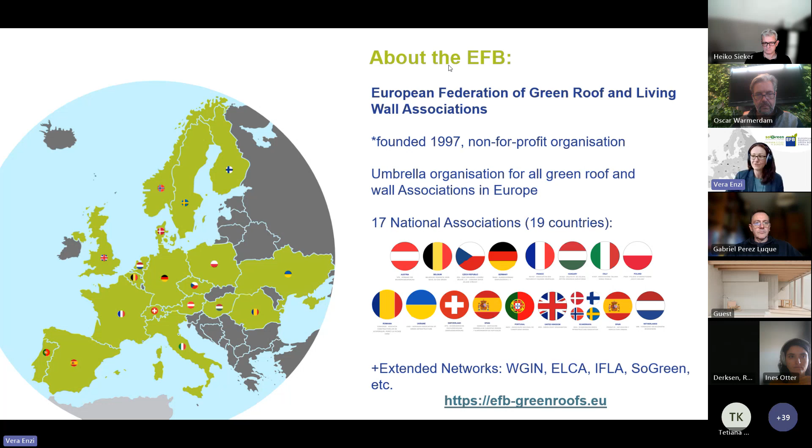And of course, we have a lot of cooperations ongoing, for example with the World Green Infrastructure Network, the European Landscape Contractors Association, the International Federation of Landscape Architects, our SoGreen initiatives, etc. If you're interested, please feel free to visit the EFB website or get in contact with us over our different social media channels or via email.

Yes, my introduction talk, we already heard it. I'm from Austria. My background is actually landscape planning and landscape architecture. I've worked in research and also practice on especially green roofs and green walls, but I've also touched certain recent developments, like for example sponge city tree planting.

We had a very large flood event in Austria over the past few months. You can see a picture here on the left. Basically a very huge area of Austria looked like this for a couple of days. It was a big disaster. Even people died. It took a lot of time, of course, to get all the water away again.

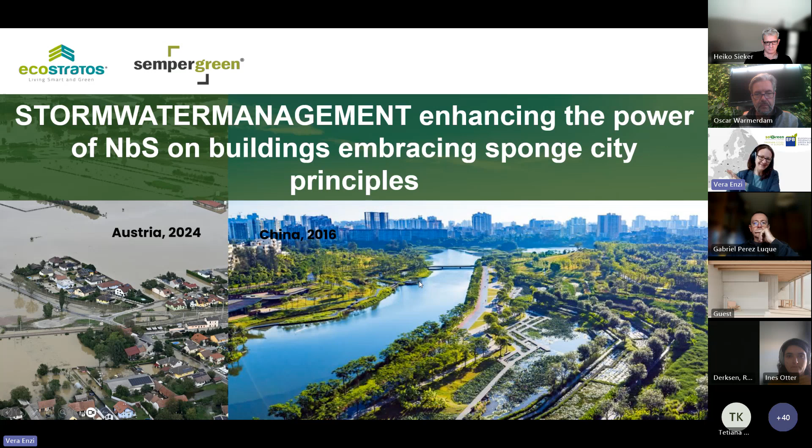And still a lot of insurance companies obviously have their cases open. And what could be more interesting than this current time to talk about stormwater management and enhancing the power of nature-based solutions for stormwater management, and embracing maybe sponge city principles. So this is a Chinese city that you see on the right side. It was actually reshaped by Kongjian Yu. Maybe you know him, he's like the Pope of the sponge city, inventor of many projects and principles. So I think what we are going to talk about today will refer very well to these two pictures.

Yes, what's coming now in my brief 10 minutes. So I'm going to do a quick overview for you on the European Commission terminology - where do we find stormwater management currently? Then I will pinpoint some related EU policies and directives in that context, where we as EFB and on the national levels, people like you and all the people who are listening, can actually do something about this and bring forward this important matter. I will focus quickly on what national associations can do on their national scopes and levels in the current situation.

I'm going to close my quick overview with two related Horizon projects that are just about to close next year, which I personally found very interesting and I'm following because I think they have quite interesting content.

It all started a couple of years ago. The European Commission, in the very beginning, published Eine grüne Infrastruktur, a green infrastructure for Europe. Starting with this, a lot of different concepts, regulations and policies have been embedded. You can already see in this picture a lot of important components for stormwater management, because these are all different kinds of solutions.

If we're talking about natural river reconstruction, or of course green roofs and green walls, or also nature protection areas, biological agriculture, sustainable tourism - there's a lot of different activities that can come together in order to help water get treated on site and get into a natural water cycle on site, so that heavy storm events can pass without big damage.

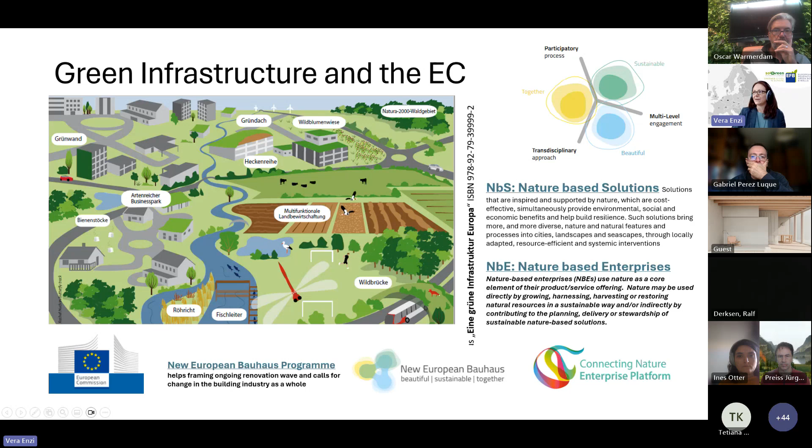In order to bring us who are delivering - planners, system providers, etc. - together, the Connecting Nature Enterprise Platform was established a few years ago. It's a large, growing community, so in case you're interested, I advise you to take a look and maybe sign up there.

What else did I bring today in relation to stormwater management and the European Commission? Current drivers - we have a lot of interesting directives and national processes ongoing.

What you can see here are the guidelines for member states for the adaptation strategies and plans - basically a manual provided by the Commission for our national member states in order to successfully adapt to climate change.

Then we have four different directives that I brought today - there are even more, but I just picked a few with a direct link to what we're discussing today. The first would be the Urban Wastewater Directive. It currently has an open window where, on national level, member states have to establish their national integrated urban wastewater management plans until 2033. Of course, there are people already working on these plans. Now is the time we integrate nature-based solutions also on buildings, like green roofs and walls, into these national plans. So if you get knowledge about people working on these plans, get in contact and be a good consultant for them.

Second, the EU Nature Restoration Law, which passed a few months ago - I must say I'm very happy about that. The nature restoration law also contains measures for urban areas and cities, for example when it comes to a certain degree of tree coverage. But also now, members must prepare their national restoration plans and submit them until 2026.

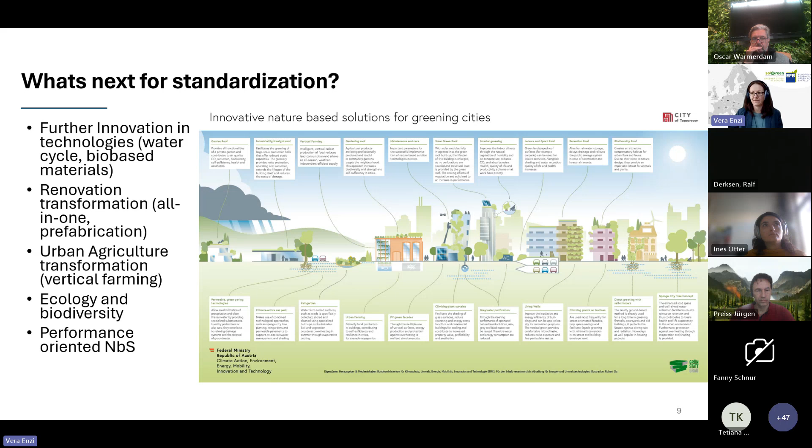And a lot of these technologies nowadays are also not standardized, just like green technologies. So here also lies a lot of work in integrating closed water cycles, bio-based materials, prefabrication, ecology, to be honest, a lot of performance-oriented aspects of nature-based solutions.

This is my last recommendation before I open the floor for our second speaker. These are two ongoing Horizon projects supported by the European Commission that I found quite interesting. They are both focused on nature-based solutions for water treatment, approached with different scopes and styles. The first one is Multisource.

They also work with demonstration areas and demonstration plots where they actually take their measures out. In the case of Multisource, for example, in Leipzig at the Umweltforschungszentrum, there is a big green roof test site for stormwater management, and the results from this test site are implemented in the NAT4WAT management tool that planners will be able to use after the project is finished.

They also try to engage and present the results of the project in specific policy briefs that can be used very well if, for example, you want to inform a city or a policy officer on suitable solutions they could undertake.

So these policy briefs are published on the website. The second project is the NICE project, which focuses a lot on green roofs and green walls, as well as different aspects of water treatment. This project is very strong in its events, and it offers a huge amount of webinars specified to certain NBS technologies.

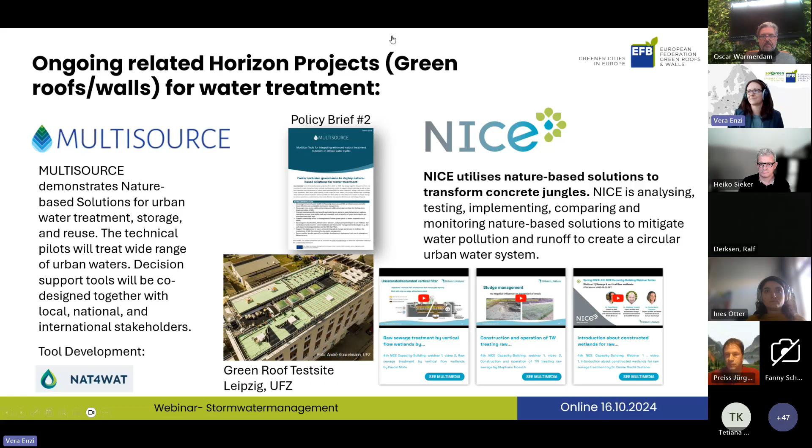I would talk about stormwater management, between heavy rainfall on one side and heat stress and drought problems on the other side. I do this from a Berlin perspective, because Berlin is in a few ways quite special, and I want to explain this first, because maybe then it's easier to understand why we follow this strategy in stormwater management.

As far as I know, Berlin is the only larger city in Europe which takes all its drinking water from within the city border. We do not import water. That has to do with the historical situation - there was a wall around at least the western part of the city. If you look at other cities, Munich gets its drinking water from the Alps, Stuttgart from Lake Constance, and other bigger cities take it from the outskirts. So Berlin is different.

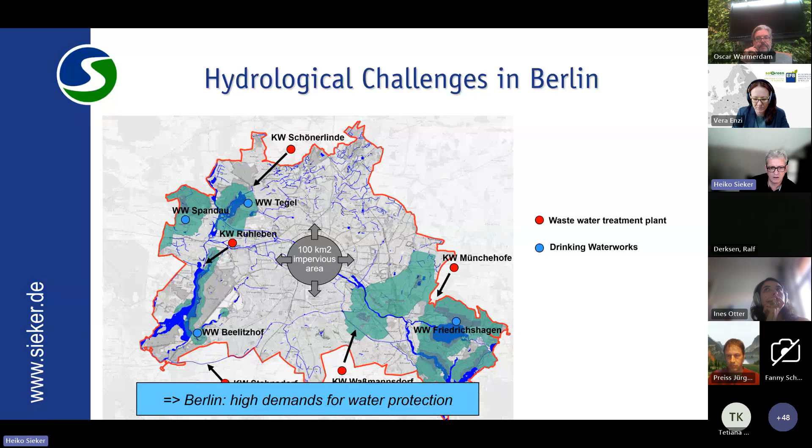That's something we've been working on here for many years. Our challenge typically is about water pollution control. Compared to other cities, we have a very slow flow in the rivers, and large areas are groundwater protection zones. So treatment is very important, also treatment for stormwater runoff, for rainwater.

On the other hand, flood control, at least in the bigger rivers, is not so much a problem - there we are in a relatively lucky situation. If you look at the River Spree and Havel, the main rivers here in Berlin, compared to bigger rivers in Germany like the Rhine, the flow rate is very, very low. However, like other cities, we have problems with overloading of the sewer system. So retention of stormwater is important, but not to protect from flooding in rivers, but more what we call pluvial flooding.

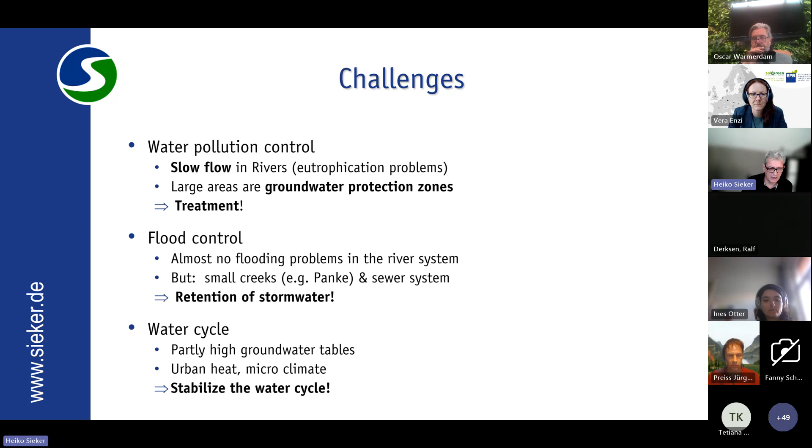And the water cycle in general is also a problem. That led, between 25 and 30 years ago, to a change of mind in Berlin regarding stormwater management. Here you see a picture of one of the first projects, which was built in the late 1990s.

And it's quite interesting, it's quite a large residential area. You can see all the buildings have green roofs. We have infiltration devices here for the road runoff. And although this residential area is located very close to the river, there's no runoff. So all the rainwater from this area stays in the area, no runoff, and keeps up the groundwater renewal and so on.

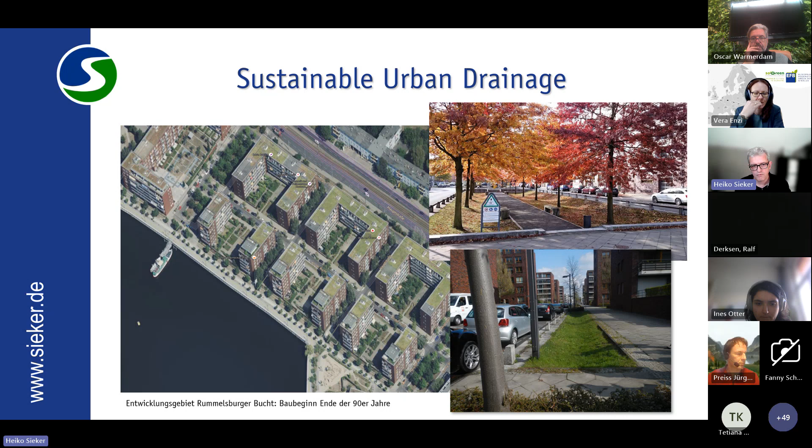What is really interesting is that these hydrological challenges changed a little bit in the last 5 to 10 years. In addition to this water pollution control challenge, we see now also a challenge regarding the quantity of water. Just a very quick, very simple calculation.

If you take all the capacities of all the water works together, it's approximately 1 million cubic meters per day. On a hot summer day, all the Berlin people, around 4 million, use 1 million cubic meters per day. And if you transfer the units, this ends up with around 12 cubic meters per second. So that's the demand for drinking water.

If you look at the inflow from the rivers, these are the two main rivers here, Spree and Havel. Together they have 36 cubic meters mean flow. And you can imagine mean flow means that is the annual average. In summer, when there's a drought situation, the inflow from these two rivers is even much lower, especially from the Spree, it's almost zero. And then the capacity of the waterworks is larger than the inflow from the rivers.

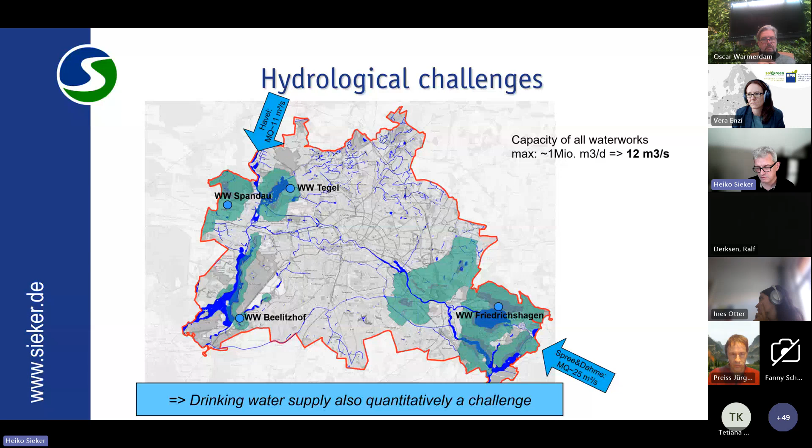And remember, we take all the water from what is created in the city. So drinking water supply quantitatively is a new challenge for the city, and our authorities here in Berlin are very aware of the situation. And the big problem is that this gets worse, mainly due to three reasons.

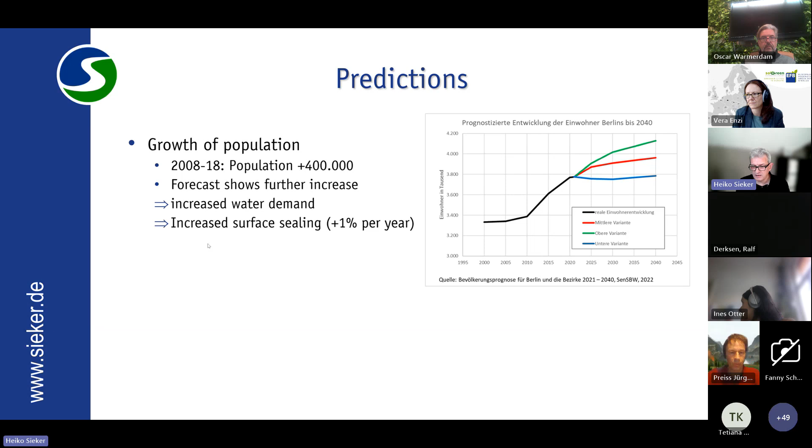First of all, our population is increasing. We have a growth in the, for example, between 2008 and 2018, so in 10 years, the population increased by 400,000 people, roughly 10%. And if you look at the forecast, all the predictions are showing further increase in the population. So that means, of course, if more people need more water, and they also increase more surface sealing, around 1% per year right now.

And then also the inflow situation is getting worse. First of all, due to climate change, but not only — it also has to do with the upstream catchment, which is shown here on this map. You see here the yellow area, that is Berlin, and the area shown in the picture is the catchment of the river. And there's a lot of coal mining.

And as you know, in Berlin we stop coal mining here until 2038, which is good from the CO2 point of view. But regarding the water situation, that means all these open coal mines will be filled up again. So all the water in the catchment will go to the open coal mines. And that means the inflow to Berlin is even going down in addition. And then climate change comes on top.

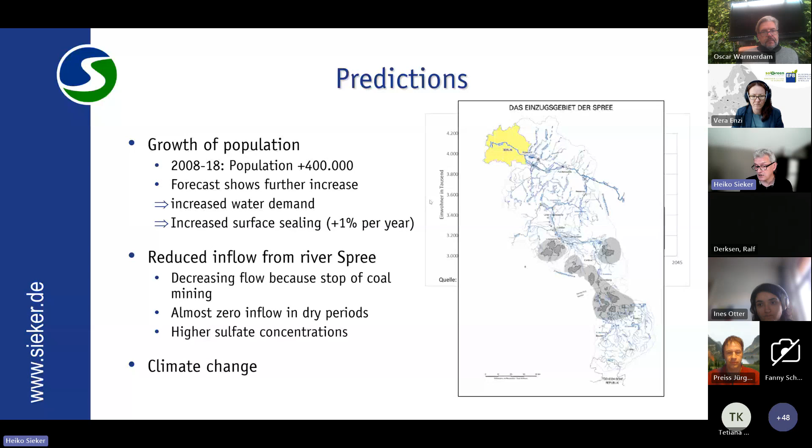And what is definitely increasing is evapotranspiration due to global warming. And global warming means higher temperatures, and higher temperature means more evapotranspiration, that's obvious. And if we look at the climatic water balance, which is the difference between rainfall and evapotranspiration, it's already negative in Berlin, and this is increasing. So the deficit is increasing.

And that means by definition, we already have what is called semi-arid conditions here in Berlin, which at least for Germany is quite new. Maybe it's different in other countries, especially in the Mediterranean area — you are used to that. But for German conditions, this is a relatively new challenge, I would say. So climate change will definitely intensify the drought problems. And this all adds up.

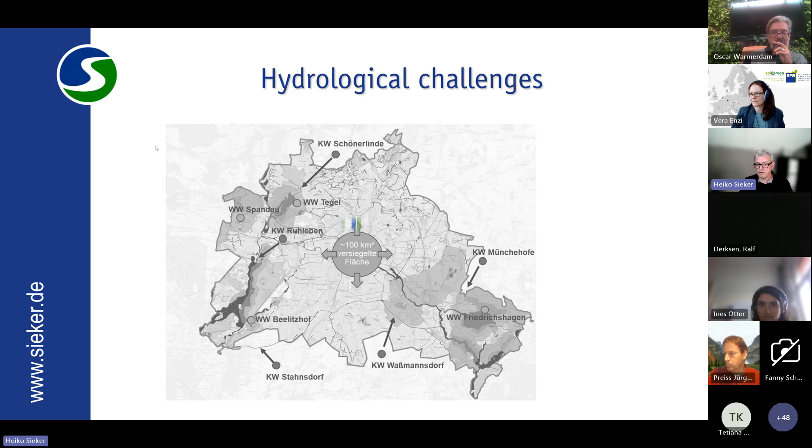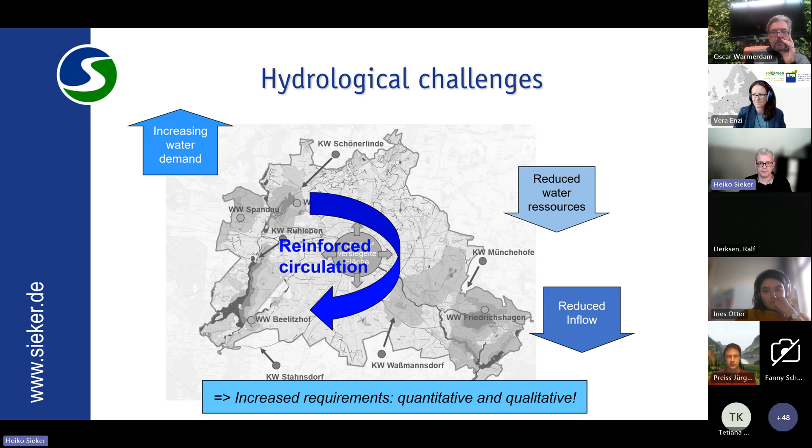We have an increasing water demand on one side, and reduced water resources and reduced inflow, which means the circulation we already have will be reinforced. We really are facing big challenges here in Berlin, and the city government is aware of that. That's a good motivation for the stormwater management, which I will explain now.

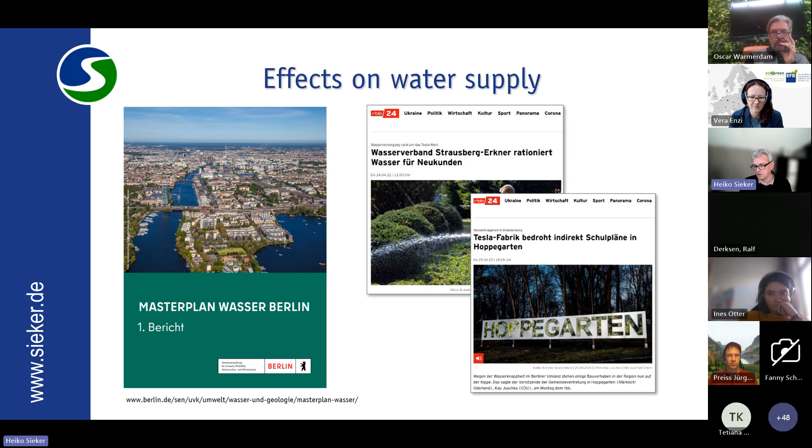Maybe some words on the effects we can already see. We have limitations in water supply. For example, myself, I'm not allowed to irrigate my lawn in summer anymore. I have restrictions. You know this from the Mediterranean area, or from Las Vegas, for example. They have similar regulations. At least in Germany, this is new.

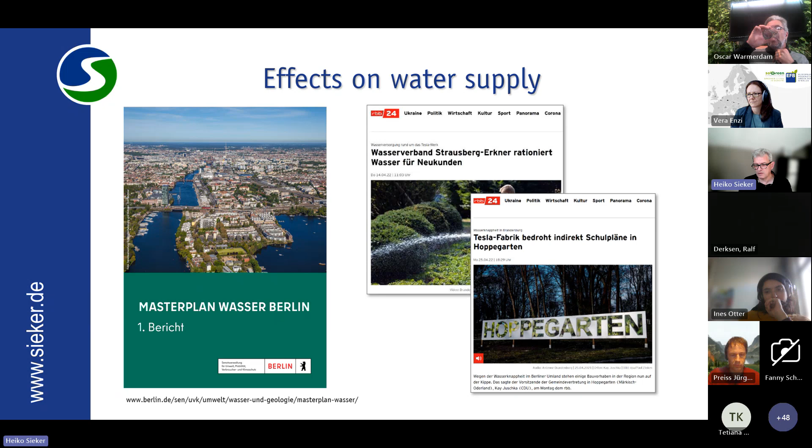We also see the effects on the water courses already. A lot of the smaller water courses are dried out. That's new, we didn't have that 20, 30 years ago. This is a new picture. So we already see, due to climate change and other factors, that the landscape is changing due to climate change, and not on a global level, but on a local level.

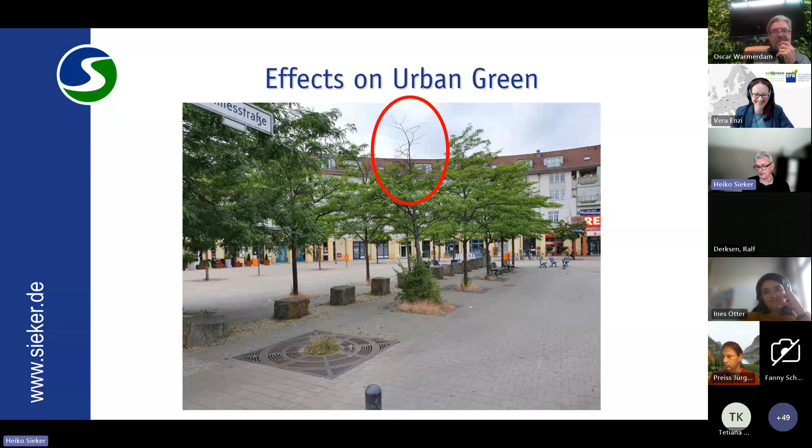That's really impressive. And what we also can see is the impacts on the urban green. We have a lot of trees in Berlin, urban trees, but many of them are in bad condition. For example, if you look at this tree here, it's not in good shape. I'm a civil engineer, not a biologist, but even as a civil engineer I see that this tree is not in a healthy condition. And if you look at this tree here in front, it's already gone.

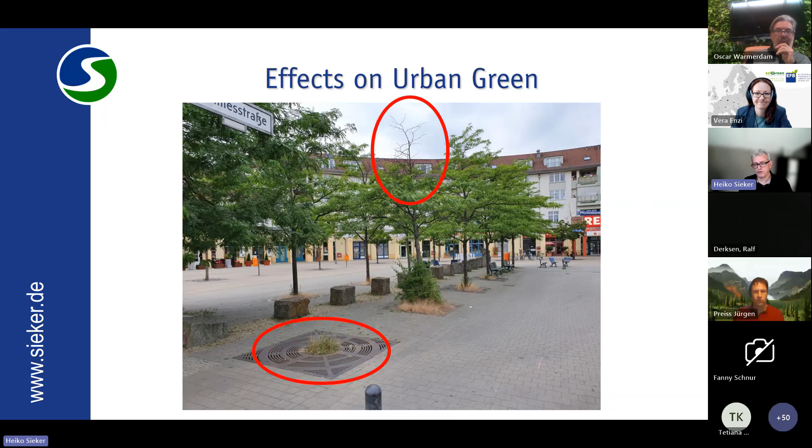This is not just a single case. I think, what I read, more than 50% of the urban trees are more or less affected by that. So in total, to summarize, we have problems with heat and drought. Our water resources, the stress on the water resources, is getting worse.

On the other hand, coming back to the title of my presentation, like every other city we have big problems with heavy rainfall. If it rains, typically the intensity is higher than it was before. We had one event here in 2017 which was really exceptional and which was a mind changer for the city administration. We had 200 millimeters in fact in 10 hours. This is not as bad as in Florida, for example, but if you compare this with the design storms we use as civil engineers, this is 10 times the design storm. So we have to deal with heavy rainfall also.

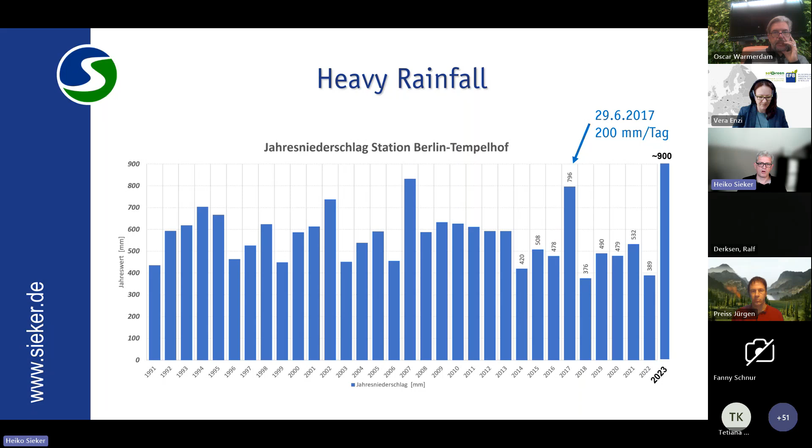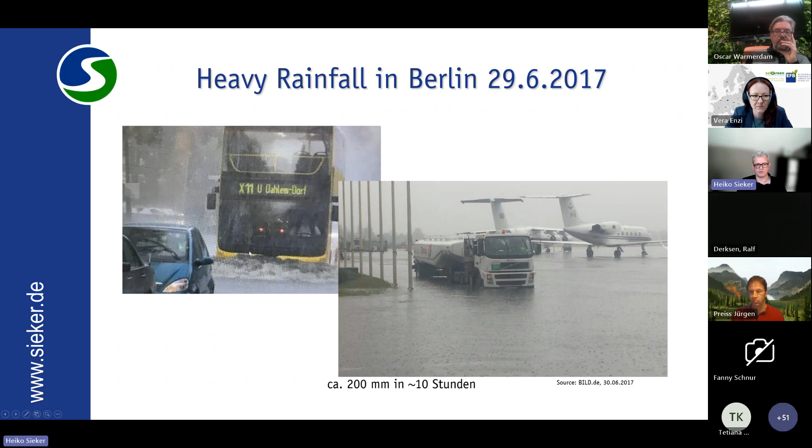So if we summarize this, we face two challenges. On one side, we have too much water during heavy rainfall, and on the other side, we have not enough water during the drought period. This is amplified by climate change for sure, but not only - it's also the urbanization. Locally, to change or influence climate change is very difficult, as you know. But regarding urbanization, we can do something. That's city planning - that is in our hands as civil engineers, as landscape architects, as city planners, to do something.

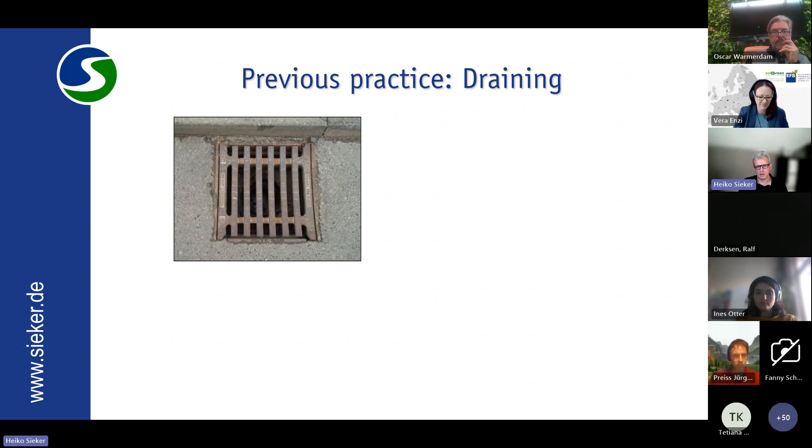So what is the response? It's definitely not the conventional way of dealing with stormwater, even though that's so logical. Our previous practice, what I learned at school when I studied in the 90s, was very simple: if you have a new residential area or a new commercial area, you need a sewer system, a storm sewer system. That was the only answer.

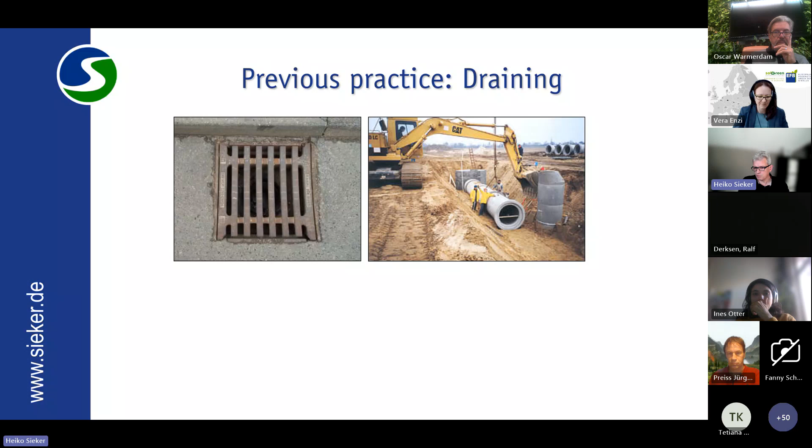And so we built a lot of pipes, and as you can see in the pictures, we trained our rivers, we built big concrete retention ponds, and so on. But even if you think that you can cope with heavy rainfall with that, it's very obvious that the other problem, the drought problem, is not getting better by this solution.

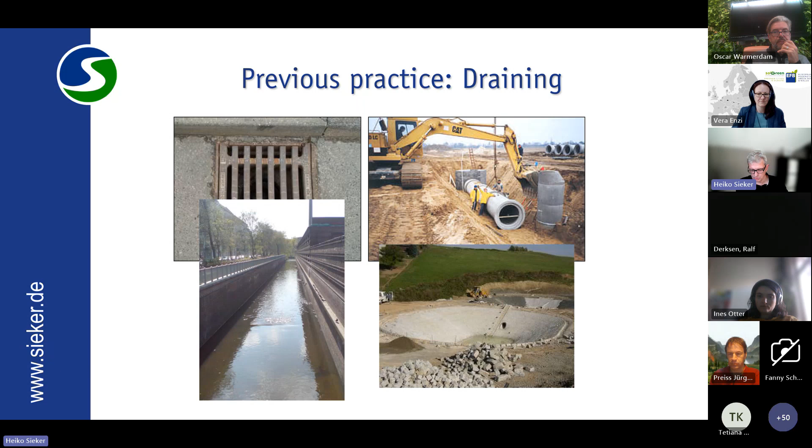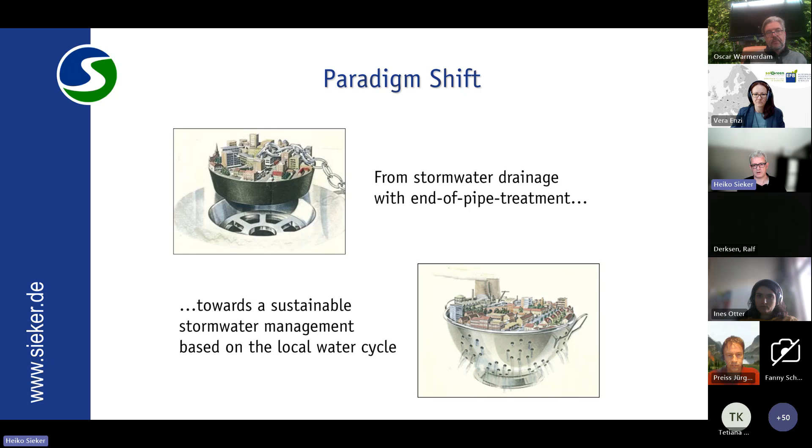So the solution is to deal in a different way with the stormwater, getting away from drainage with end-of-pipe treatment towards a more sustainable stormwater management based on the local water cycle - exactly, Vera, what you explained in your contribution. I think from the Berlin perspective, we can really say that we started to implement the Sponge City concept now in every project, and that's quite unique, at least in Germany.

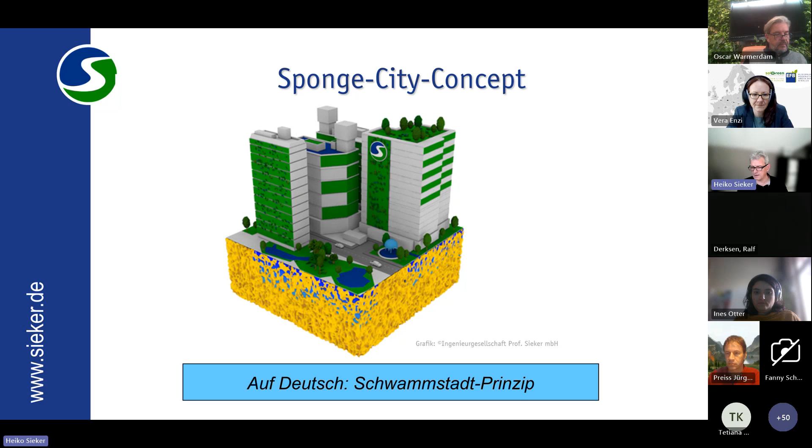There are many cities which have good pilot projects, but Berlin is far above the level of pilot projects. We do this on a frequent daily routine basis, and we implement all kinds of Sponge City elements.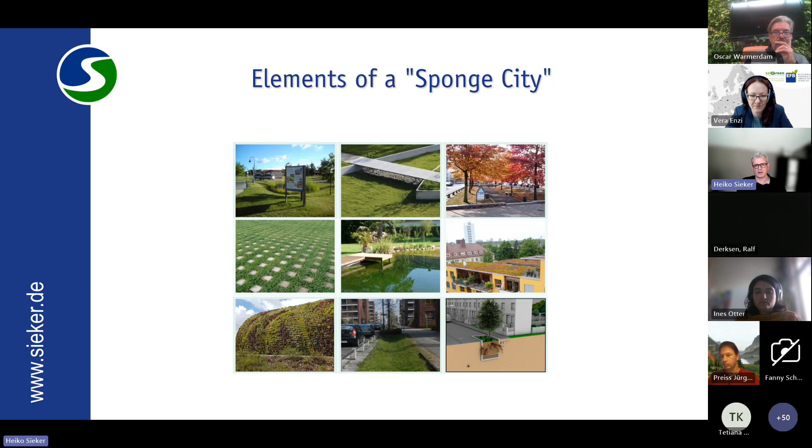For those of you not so familiar, Sponge City is not a single technique. It's more like a philosophy to deal in a different way with stormwater, and it's an umbrella for a lot of different techniques. You can see here different types of Sponge City elements: green roofs, open ponds, pervious areas, rain gardens, green walls, swales, and so on.

We started 25 years ago in Berlin. One of the big projects was the Potsdamer Platz, our central square in Berlin. The pond you see here in front is part of the rainwater management system. It's fed by runoff from the buildings in the background. So this is not a natural lake, it's an artificial pond, part of the stormwater management system.

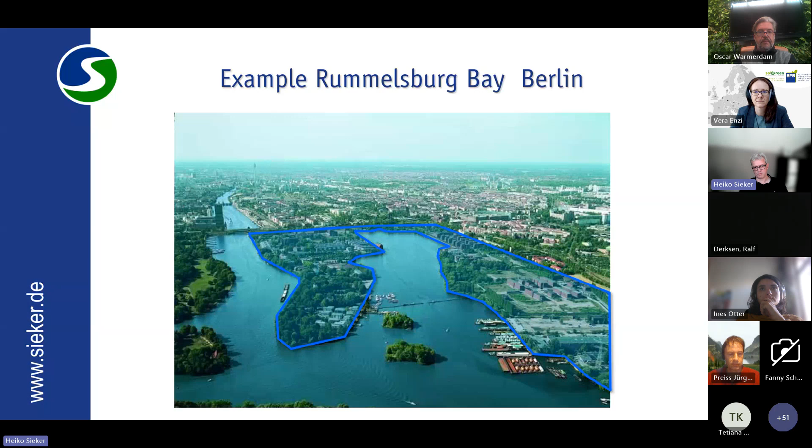I already mentioned or showed a picture of this Rummelsburg Bay. This was, I think, the best example we created 25 years ago, and you've seen this picture before. All the buildings got green roofs. We have, and this is a very important element, in the yards between the buildings a underground parking garage, and they get a green cover.

On the green roofs it's more like an extensive green roof, between 6 and 8 centimeters, not more. But here in the center, where there's an underground garage underneath, we have between 80 and 100 centimeters. That is, in fact, the best storage you can create for stormwater. It's very easy, it's very cheap, also due to statical reasons.

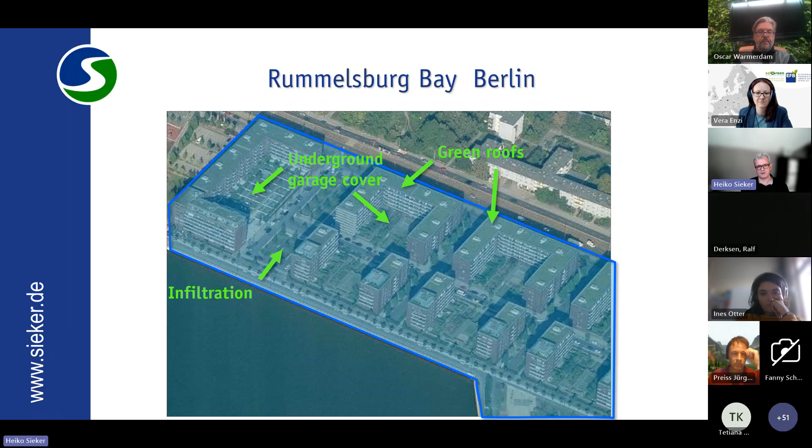Only the remaining overflow of these green roofs is then finally infiltrated. So although we have here 90% coverage with building and streets, there's not much natural ground left. However, we do not have surface runoff. So it's not the surface sealing which is creating the problem, it's the way you deal with the runoff from the impervious areas.

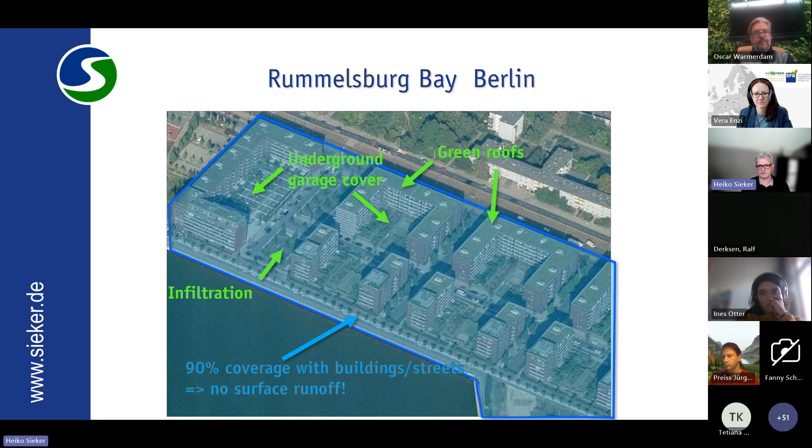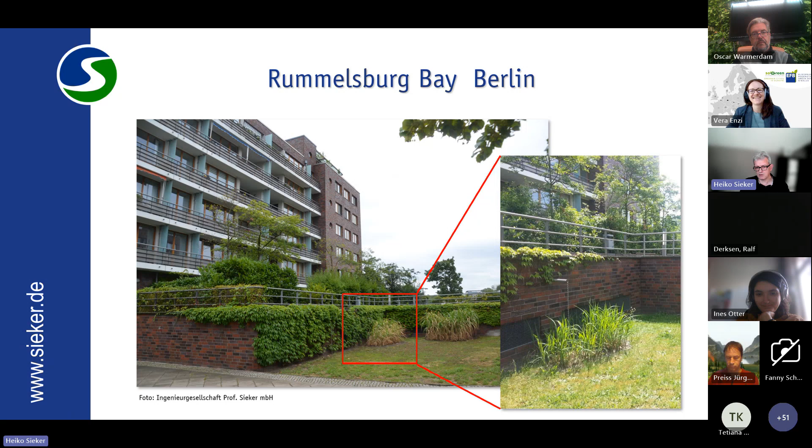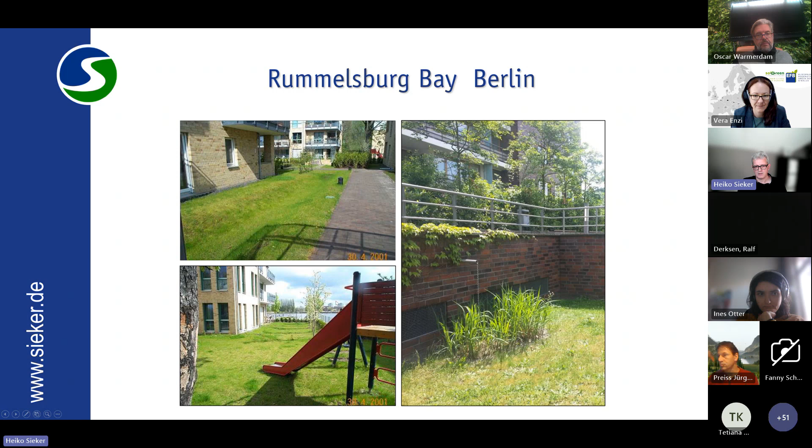This is a sponge. Yeah, it's so simple, in fact. You see from the date of the pictures these facilities are more than 25 years old, and I can invite you all, if you're ever in Berlin, visit this area. It's very impressive to see what's going on.

We also have larger, what we call pocket parks, which are first of all green spaces, but in a secondary purpose always store stormwater, especially during heavy rainfall. With this good experience from almost 25 years, especially after the heavy rainfall we had in 2017, the city introduced new regulations for stormwater drainage.

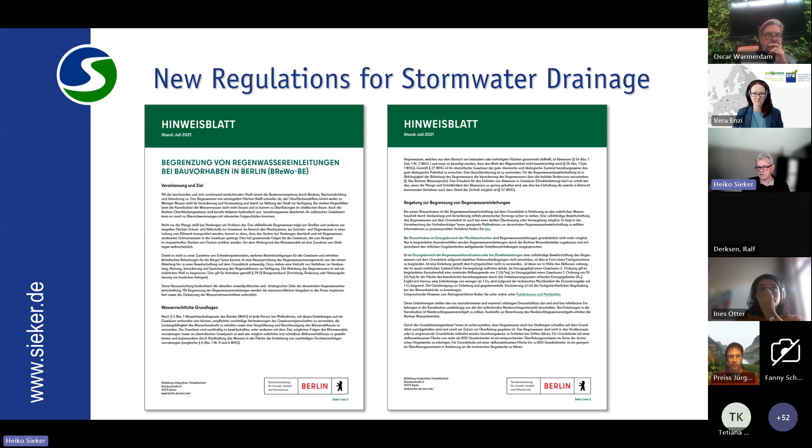That's very interesting: if you build a new house in Berlin, you're not allowed to connect your building to the storm sewer system anymore. Even if there is a stormwater pipe in the street, you're not allowed to connect. And that's unique, so the city is doing this in a very straightforward way. We have building regulations: all buildings get green roofs.

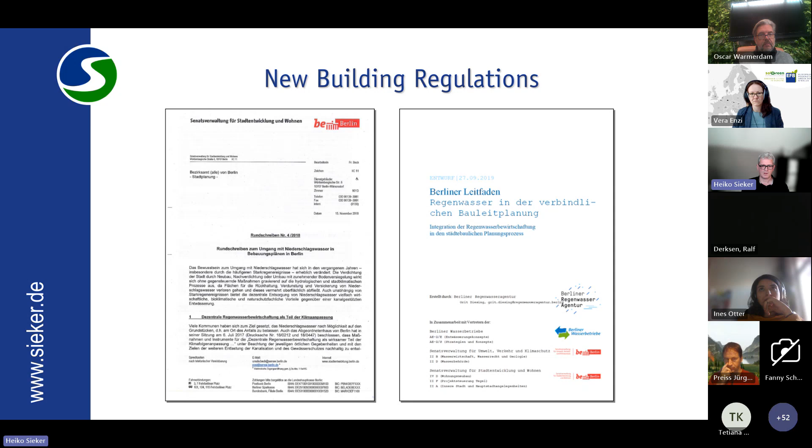Every zoning plan, every Bebauungsplan as it's called in Germany, at the very beginning of the planning process, we create a stormwater management concept for every project. Currently we have about 1,400 zoning plans in development in Berlin. So it's a very comprehensive way to deal with this stormwater here.

Also very interesting, the city created what is called a rainwater agency. It's a group of civil engineers, now part of Berlin Water, which is the operating company of the water system, and they offer consulting to all the housing companies, for example, but also to private people. So whenever you have a question here in Berlin regarding stormwater, you can call the Regenwasseragentur and they will help you out. And that's not just a technical issue.

It also has a lot to do with regulations, but also with support of the people. And that's implemented and it works very well. So as I said, we have a lot of projects here in Berlin going on.

This map shows only the really big ones. Neue Stadtquartiere means new city development areas. The big red circles mean new city districts are created with 5,000 apartments and more, 5,000 housing units or more. These are really, in fact, new parts of the city, and all of them are developed following the Sponge City approach.

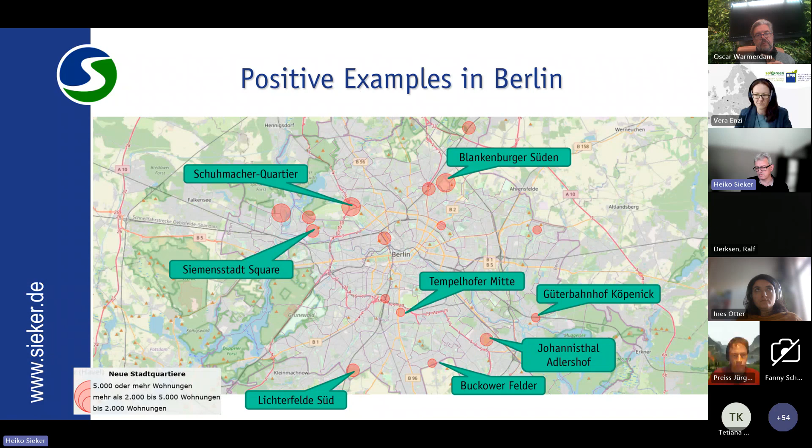So we are not just doing some pilot projects, it's really mass production, you can say, here. And of course we gain a lot of experience. At the end, I want to show you one actual example, one of the housing projects we are working on here at the moment. For Berlin standards, it's mid-size, not the biggest one. 16 hectares, about 900 housing units.

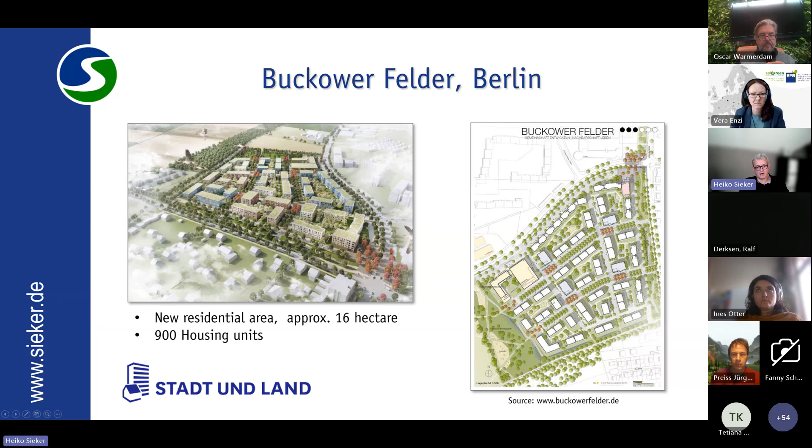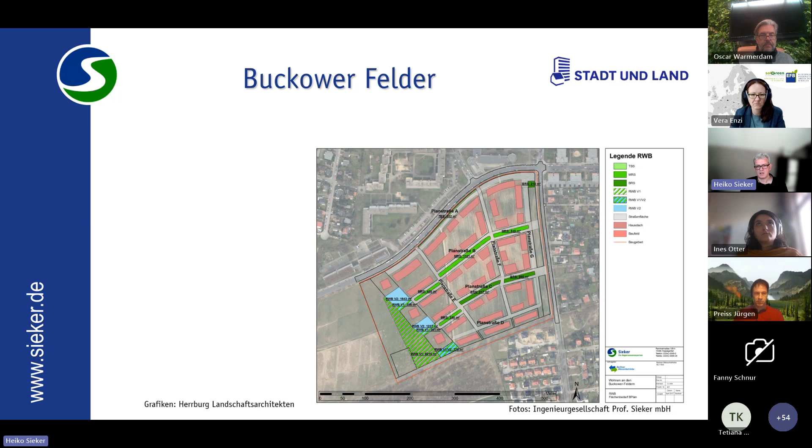You see here the city plan, master plan for this area. As I said, from the very beginning, starting with the development of the zoning plan, in parallel we worked on a stormwater management concept. In this case it's very interesting because we implement quite a lot of different technologies that has to do with the soil conditions, with the topography. For example, we have pocket wetlands, bioretention swales, optimized tree pits, and of course also green roofs.

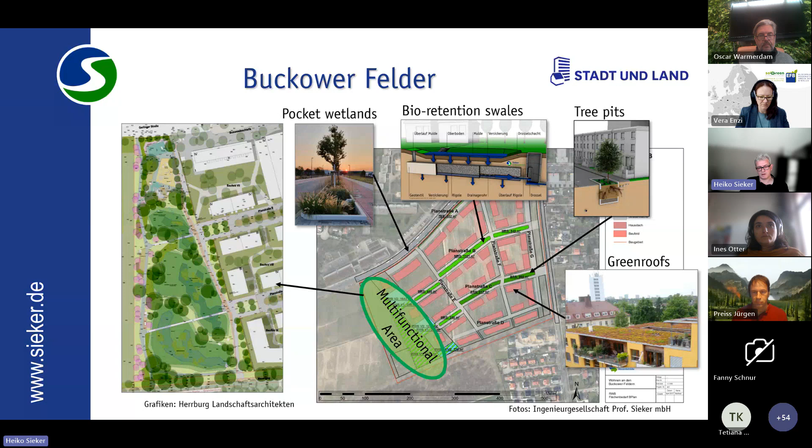Very special here is what we call a multifunctional area. In fact, it's a landscape park, which receives the overflow of the other elements. So from the green roof, for example, in winter, even if you have an intensive green roof, you have a little bit of runoff, and this is discharged into the landscape park, which you can see here in this area.

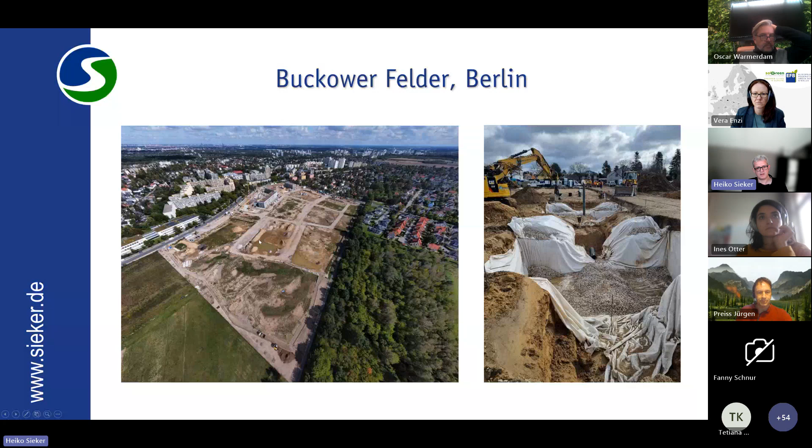This picture is from last year. The first buildings have been erected here. And this picture is from May or so. You see the landscape park is already in place. These darker green areas here are the retention areas. All the runoff here, the remaining runoff from the green roofs, from the bioretention swales and so on, finally flows into this area.

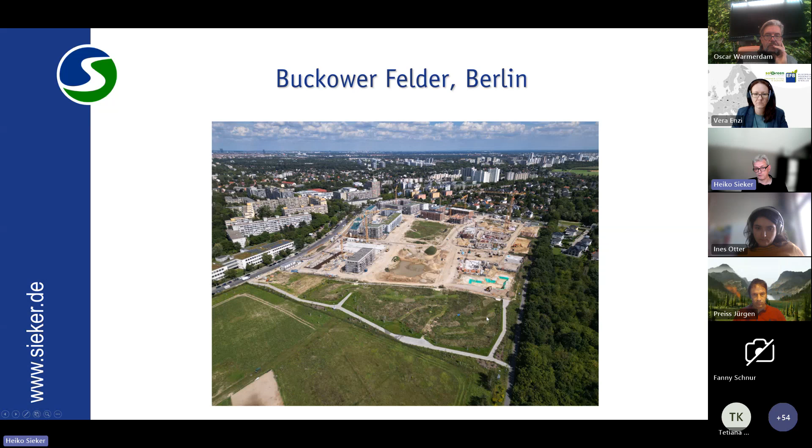Although we have loamy soil here, not a sandy soil, we have no runoff at all. All the water stays in the area. So it's, I think, a very good example.

Whenever you are in Berlin, you are invited to contact me, and it would be a pleasure for me to show you around. Thank you for your attention.

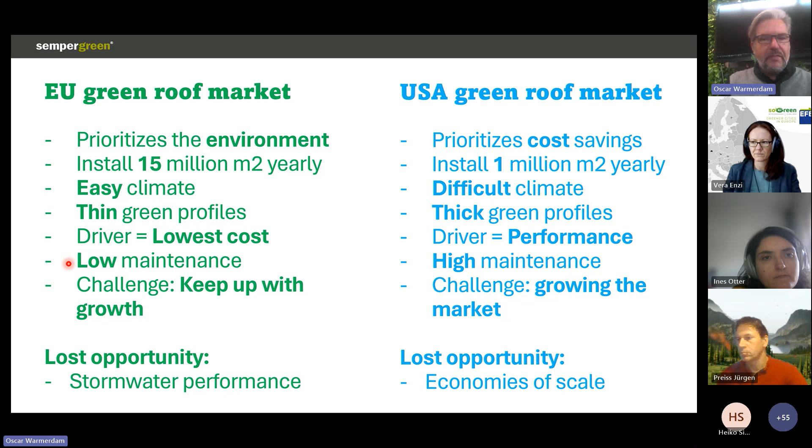On the other hand, here in the US, we're focused on a lot of proprietary materials, which makes the green roof very expensive, and that hurts our economies of scale. So that gives you a sense of the difference between those two markets.

In 2016, we started building this laboratory in Culpeper, Virginia, about an hour southwest of Washington, D.C. It's a very beautiful climate—the sun always shines here, except for the one week we have hurricane weather. This laboratory was built with the intent of truly understanding the hydrology, the movement of water in a green roof.

The industry has been relying on FLL type performance statements, so a drainage layer has an FLL test in order to establish how much water it holds, as well as the soil and layers like mineral wool. They all have static tests that will tell you how much water those systems can handle.

Most of those tests are built to predict what the maximum weight of that roof assembly will be, worst case scenario, so that the structural engineer has a number to work with. They really don't give a truthful picture about how much water is available to the plant or how it performs on an annualized basis.

So our first objective was to fully understand, okay, when it rains, can we reach those FLL numbers with rainfall? And in case we don't, what is the reality? It turns out that FLL overstates the retention capacity of a green roof rather substantially, because the test is done by taking a canister of soil, dropping it in water, and that canister is pressurized from all directions. Rain is not pressurizing the roof. Rain is just water that falls on a roof and finds its way to the bottom of the green roof, and it usually is about 70 or 75% of what FLL promises.

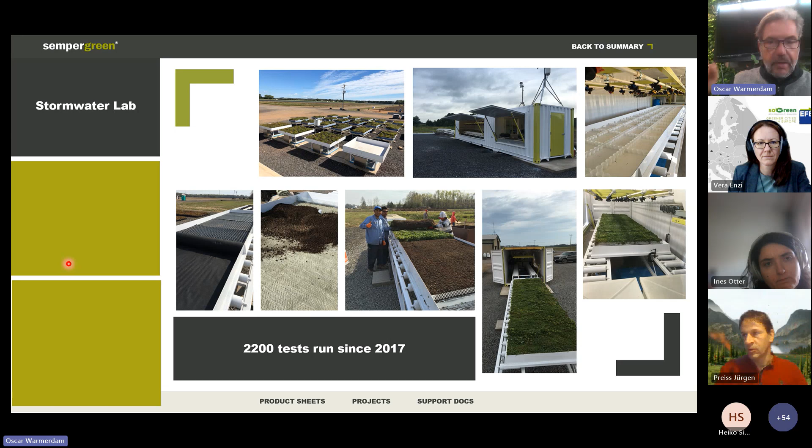Well, and that kind of stumped us a bit, because we went back to the laboratory. Over the last 8 years, we literally pumped over $1 million into this whole research project. Sounds a bit insane, but every year it's a little bit, and it becomes a large number. But we rebuilt the laboratory once again, and we started looking: is this engineer really correct? If a green roof is fully saturated, does the water move vertically and then into the drainage layer and then horizontally off the roof really as fast as they claimed?

And the result was exactly as they predicted. A fully saturated green roof, if it gets resaturated with another rain event, delays the water for about 4 or 5 minutes, and that's really not a lot. So that doesn't mean that green roofs are not functional or don't serve a purpose. It just means that they have an incomplete purpose, so they solve most of the rain events, but not all of the rain events.

So when you look at most cities, to make sure that we understand what a storm event is, at least in the US it's defined as a rain event that is followed by a 6-hour long period of no rain. So a rain event can be 20 minutes, but it can also be 3 weeks long, as long as there's no period of drought or dryness in between that is 6 hours or longer.

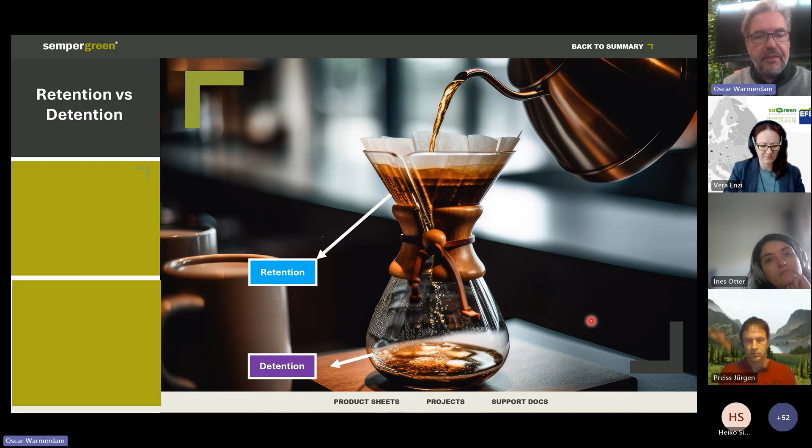It's very simple. So the retention amount of a green roof is fairly well defined, and the detention amount is basically one of the shortcomings that we believe we can turn into an opportunity as an industry, so that we can justify green roofs as an even more effective tool and get more people to adopt them.

You all know that retention helps prevent these sewer outfalls. I think you've seen these pictures probably hundreds of times over the last number of years. But I'm always surprised that the public doesn't know this. When I ask people in New York or Washington D.C., do you know what these big pipes are for? It's raw sewage - literally whatever you flush down the toilet comes out of these pipes every time it rains more than a centimeter in New York City.

There are about 30 overflow events in Washington D.C., and I think we have about 180 of these pipes. So this is kind of literally a dirty secret that the public doesn't seem to know about.

But green roofs, traditional green roofs, help fight this particular problem. And that's why in the US at least, civil engineers and policymakers don't call green roofs stormwater management tools - they call them water quality tools. And by defining them as a water quality tool, it actually cleans up and clarifies a little bit better what the purpose of the traditional green roof is, and what its limitations are.

So a 1-inch design storm, roughly 2.5 centimeters of water, is roughly the target that a US green roof needs to be able to absorb from a dry to wet state.

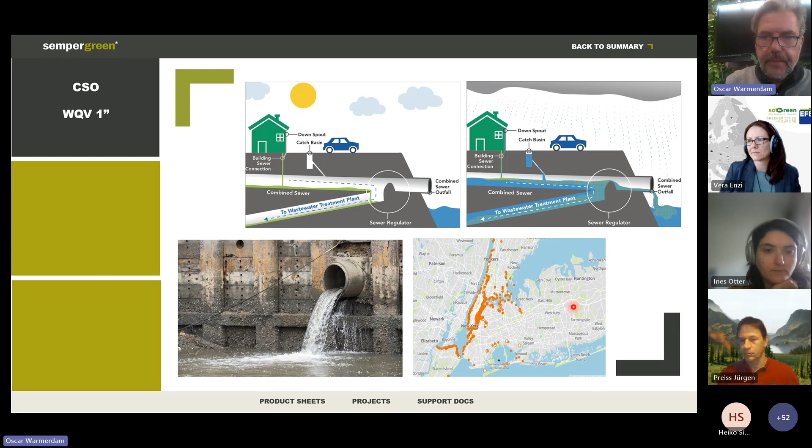The problem with what I mentioned earlier on with the FLL approach - there's nothing wrong with FLL - but by using only static values, by basically saying well, if we make the sponge as big as possible, or if we put a bucket, a meter deep bucket on the roof, and we just create a swimming pool on the roof, does that help?

And what you really see is that retention is really a function of evapotranspiration. So if you think of an empty bucket that is a meter deep, and you have a meter of rainfall, then you would think, well, on an annualized basis, within that 1 meter bucket, I can absorb a meter worth of rainfall, and there's no runoff.

So if you start with an empty bucket, that is true. But if you start January 1st with a bucket that is full, like the civil engineer was suggesting, then the only way more water can enter that bucket is if water has left the bucket to begin with. And evapotranspiration is the way to empty the bucket.

So a green roof is like a bucket. And the performance of that green roof is driven by wind, temperature, humidity, and of course rain and sunshine. So 4 of those factors are basically telling you the output, how much water evapotranspires, and one of them tells you how much water falls in.

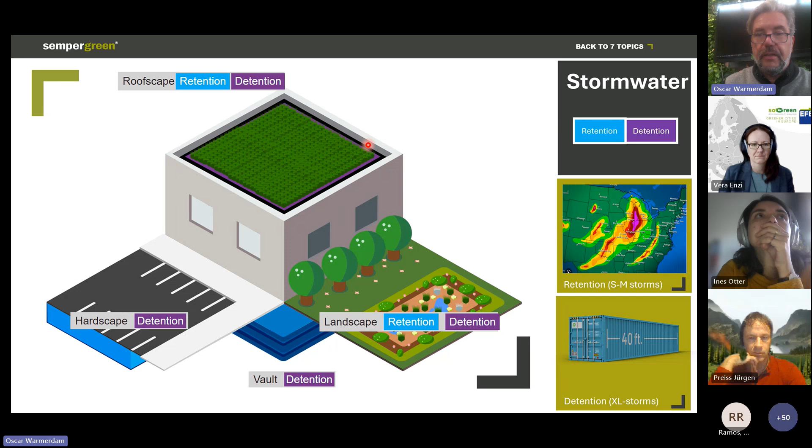Usually the landscape is the cheapest. The tank is usually also very affordable, but the tank doesn't clean the water, so that usually has a water quality concern that has to be resolved. The roof used to be able to only retain water, still needing a tank, but we can now upgrade the roof and basically take this tank portion and place it on the roof and hold that water there until 24 or 48 hours later.

So here you can see those alternatives a little closer. Heiko was talking about the successes of bioretention, and this is probably the best solution if you have the space at grade. This is the cheapest and probably the best solution.

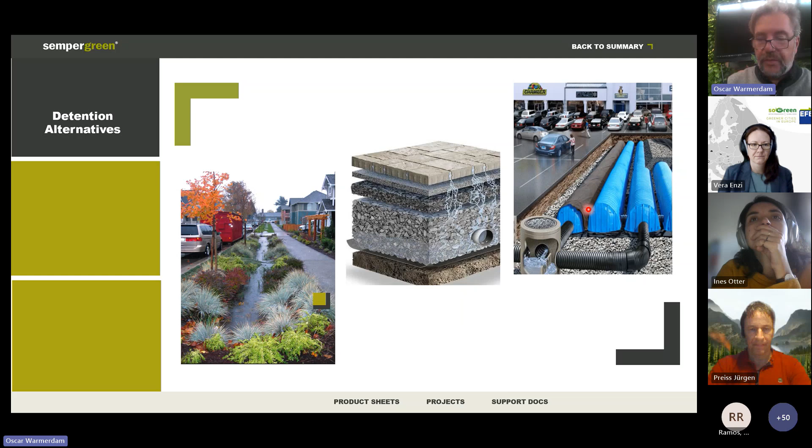Permeable pavement is just surface area, paved area that lets water go through. That doesn't clean the water, and it's actually fairly expensive. And then, of course, you have these underground tanks. So those are the alternatives that we compete with when you're talking about rooftop detention.

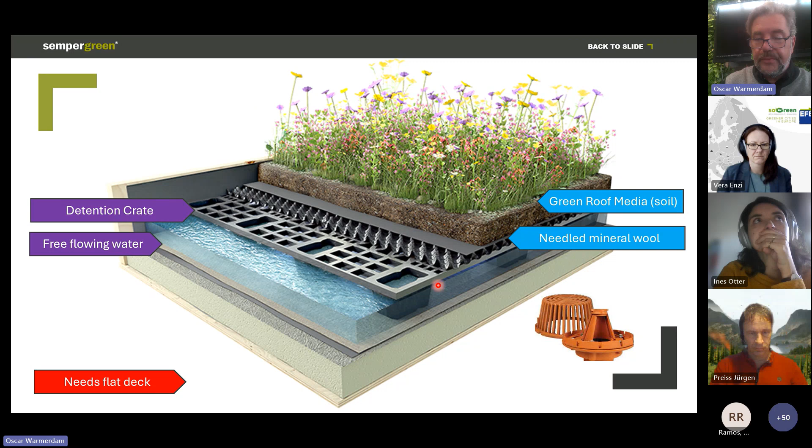The tricky part is that this can usually only be done on flat or relatively flat roofs. In the US, at least 90% of the roofs are sloped, so in the US we have a slightly different approach. For the sloped roofs, and also actually in Europe, we do this as well.

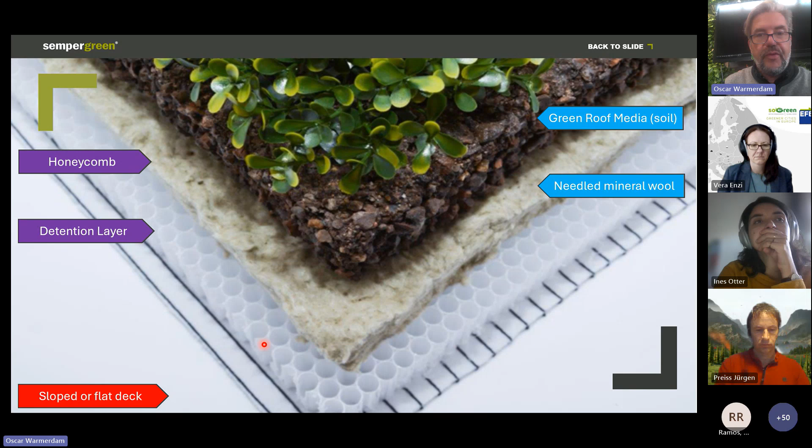The bottom two layers, the detention layer and the honeycomb, are actually the two areas that store the water that passes through the green roof and prevent it from flowing out faster than 24 to 48 hours. So upgrading the green roof allows us to do a couple of things. I realize I'm a minute over, so I have 2 more slides.

Modeling a green roof can be done in multiple ways. We have a proprietary system. The HydroCAD is a system that most civil engineers use. SWMM is what most policymakers are using.

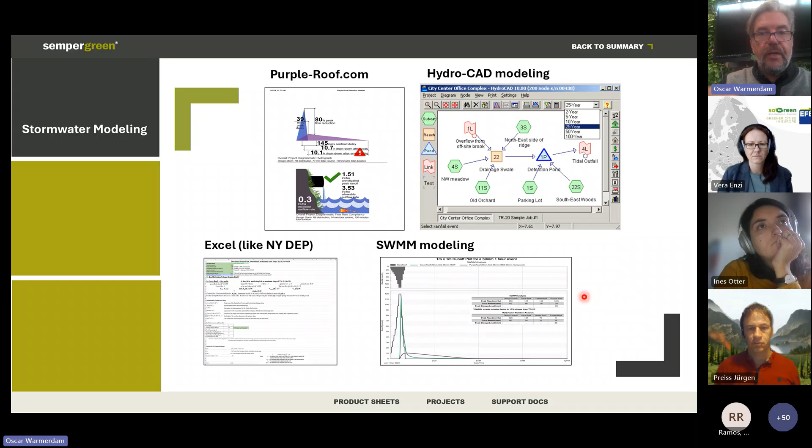New York City has a very simple Excel sheet. But by modeling a green roof and using rather complicated ways of calculating their annualized behavior, and dialing them in so much that they can be replacing the tank or the pipe or whatever else at grade that they don't have any space for, the green roof can have 2 functions: retention and detention.

In this particular case, this building owner in Toronto, it's a building that is roughly half a hectare. And in red over here, you can see the dimension of the stormwater tank. So the stormwater tank is only there for detention, for the water that comes off the roof in excess of the retention capacity of the green roof.

They still needed a tank that actually occupied 9 parking spots. Now you might think, well, why don't you just go deeper and put the tank underneath the parking spots? Problem solved. But the tank has to be above the sewer pipe, so it always has to be within the first 2 or 3 meters of soil depth.

These 9 parking spots generate in Toronto about $22,000 a year in parking fees. So there was $180,000, or a little bit more, lost in stormwater detention. And note that this tank is only filled up about 10 times a year for about 24 to 48 hours. What a waste of space that was.

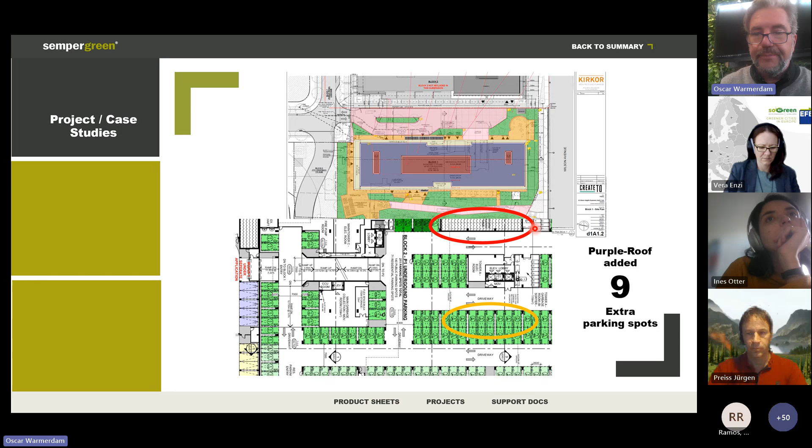So that is our argument for green roofs. In many areas where they are required, it's great - that's a good market, can't complain. But here in the US, the majority of cities don't have that requirement or compliance requirement. And the only way we can get a green roof on top of that building is to make it work and create a real return on investment. Detention is a much better financial tool with much bigger consequences than retention.

Thank you for your time.